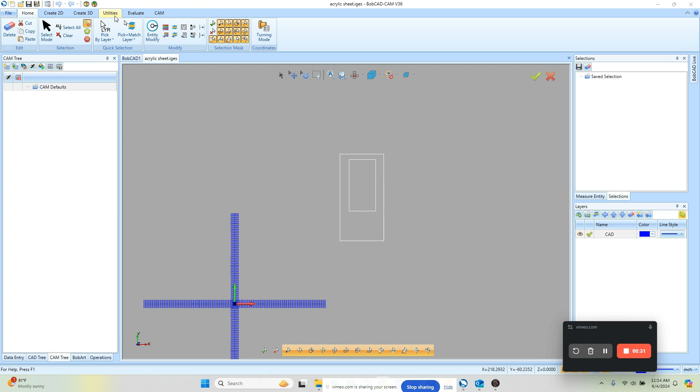So what are we going to do? We're going to move our geometry into position. So we'll go Utilities and Translate. We're going to window pick our geometry. We're going to pick our initial reference point. So we want to pick this location. And then we're going to tell it to go to 0. And we'll choose OK. All right, so that moves our geometry to 0.

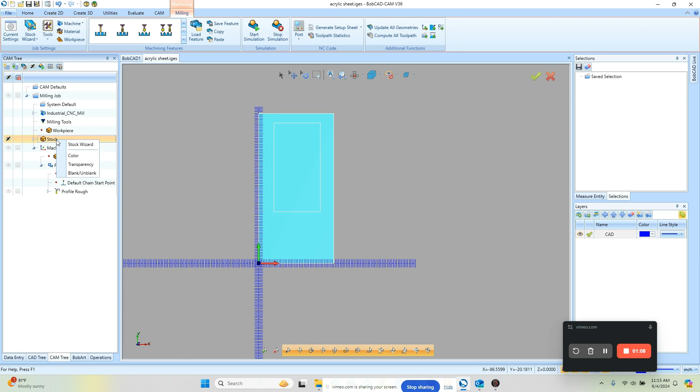Then we'll click on the CAM tab. We're going to right click on the CAM default and we're going to go job from template, and we're going to load our 750 MDF template and choose OK. From here we're going to run the stock wizard, and the only thing we're going to change is the thickness. So we'll change it to 1/4 inch, which is really just for simulation purposes. We'll hit tab and then OK.

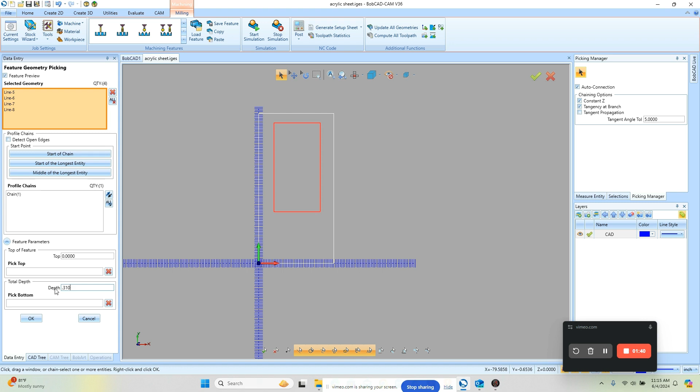So now we've set up our 0, we've set up our stock, and we have our cutting routine from the MDF example. We'll want to right click on our geometry and choose reselect. We're going to window pick our profile. We're going to adjust our depth. We're going to make this, let's just make it .31 for this example, and we'll choose OK. We'll come in and reverse our direction, and we're going to choose compute. And we'll see the tool is cutting on the outside.

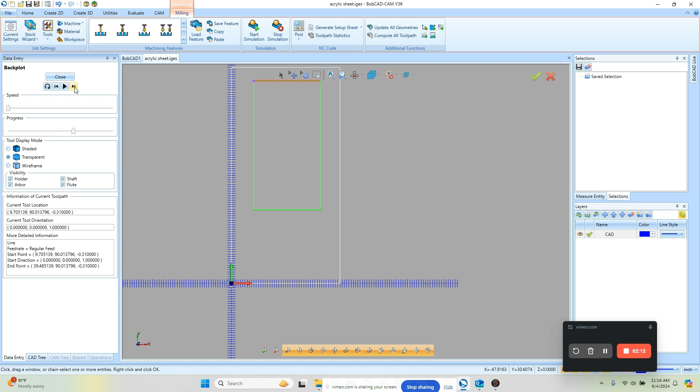We're going to right click on the operation and choose backplot, and what we'll notice is we're getting clockwise cutting. So when we're cutting clockwise, this is considered climb milling. That's what they call it. And what we want to do is actually cut counterclockwise, but we want to be on the outside of the part. Right now you can see the tool is on the outside of the part, but it's cutting clockwise, right? So how do we change the cut direction and have it cut on the outside?

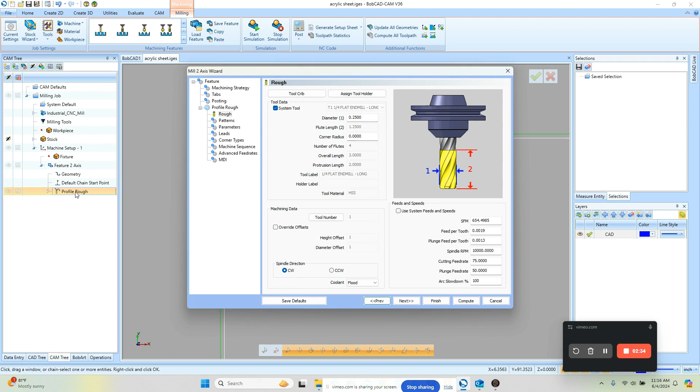Well, we're going to double click on our profile operation. We're going to go to patterns, and then instead of system compensation left, we're going to make system compensation right. Okay, so that means when we're cutting counterclockwise, it will offset to the outside. Okay, and that's the direction. We want to cut counterclockwise on the outside.

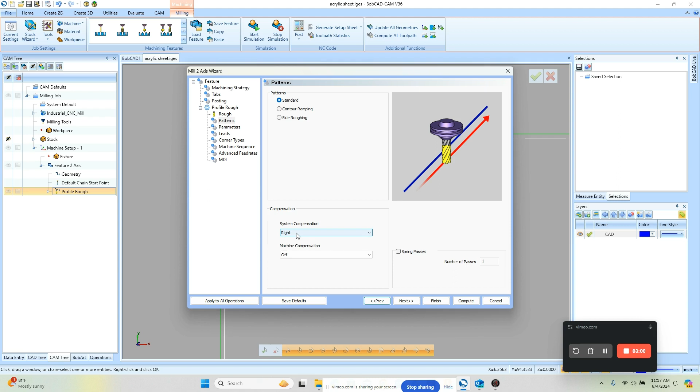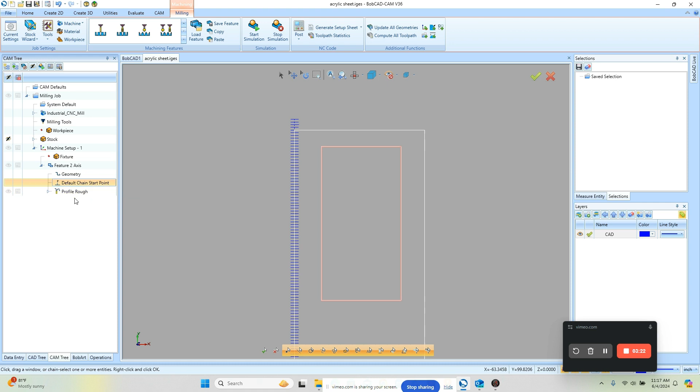So we set this to right, we choose compute, and you can see the tool is offset to the inside. Okay, but right now it's cutting based on our cut direction. Okay, so we need to reverse the cut direction, recompute. All right, and now we can see the tool is on the outside, and when we backplot this, we'll see that it's cutting counterclockwise, which is what we want.

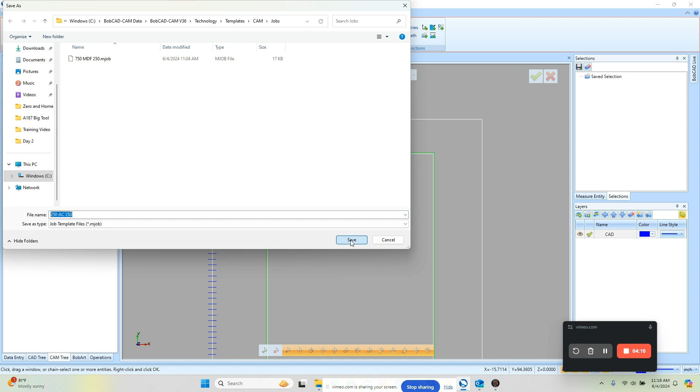All right, so now that we've done that, what we want to do is save this as a template, so that way we don't have to do it the next time. So we right click on milling job, we come down to save job as template. All right, this one we're going to make 250 acrylic, 250 AC, I guess, and then we'll say 250, okay, and we'll choose save. So now if we need to do an acrylic job, we can load the acrylic template. If we're working on an MDF job, we can load an MDF template.